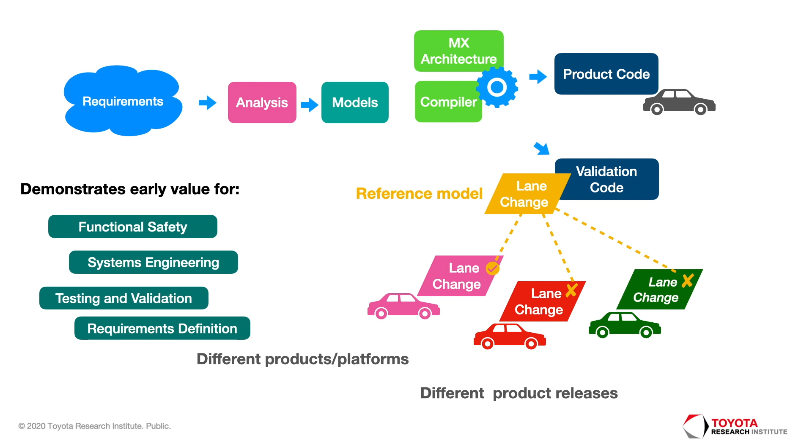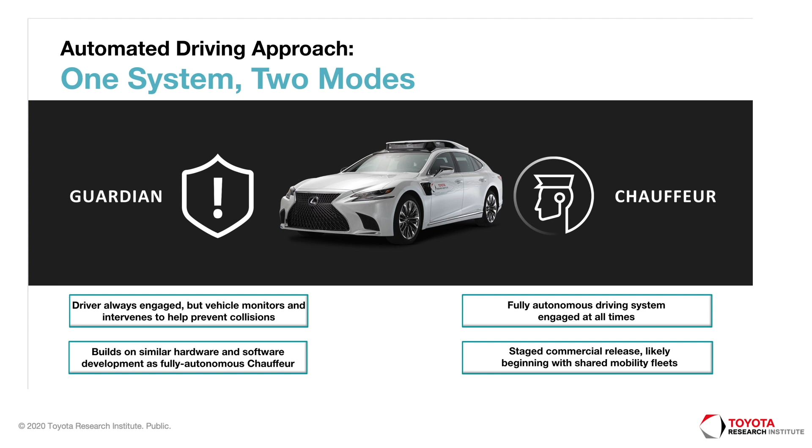So imagine, for example, you are driving along and a car suddenly pulls out behind a truck parked in front of you. Also imagine that you're aging. I was going to say grandparents, but let's face it, none of us are as fast as we used to be. You're not quite quick enough as you grab the wheel, so Guardian will amplify the response and safely guide you around the obstacle, seamlessly returning primary control back to you. This really encapsulates the spirit of Toyota in both our driving and robotics divisions. Our goal is not to replace humans, but to augment human capabilities so that we can do what we love to do safely, even as we age.

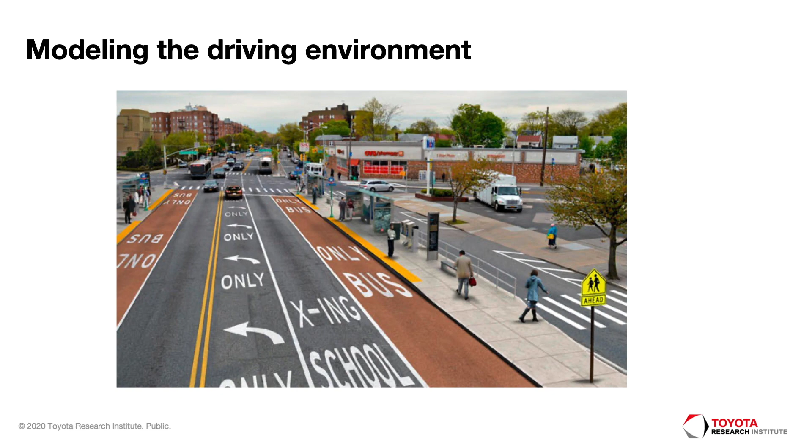Now look at it from a human perspective. Your inexperienced 17-year-old son or daughter can probably get through here with little difficulty. You can quickly reason where you can drive, where you can't, where and when you should stop, where you should yield, and so forth. Why is it so easy for us and so difficult from a computing perspective? I believe that part of the answer has to do with how our brains automatically filter information, and there are some parallels with our concept of subject matter domains.

On any executable UML project, we know that the first thing we need to identify is the application domain, which encapsulates the business purpose of our system. So what is the business purpose of our system? Well, if we are building an uncrashable car, it's not to crash. Plain and simple. Go the places you need to go, and don't hit or endanger anything along the way. We call this the vehicle guidance domain, not to be confused with low-level vehicle control. So the mission of this domain is: don't hit any pedestrians or vehicles, change lanes safely, respect traffic signals, basically follow the rules, and drive defensively.

Let's take a concrete example. Pun absolutely intended. Imagine directing the vehicle to get in the left lane, hang a left at the upcoming intersection, and end up in the leftmost lane on the other side. The elements that influence this progression of steps are at a minimum: the road, lanes, lane crossing policy, allowed turn movement, intersection, crosswalks, and oncoming traffic.

But let's hold on for a moment. We can easily find an endless set of features and low-level behaviors necessary to get all this to work, and succumb to so much complexity that we'd be tempted to abandon modeling altogether, and just hope that machine learning could solve all our problems somehow.

This is where I take a deep breath and tell you what 40 years of modeling have taught me as the most fundamental tool for wrangling seemingly infinite complexity. Are you ready? On the next slide, I'm going to give you the modeler's answer to the ultimate question of life, the universe, and everything. Seriously. Are you ready for it? Here we go. The true power of a model comes from what it excludes. You're welcome. I imagine that's only slightly more satisfying than 42, but let me elaborate.

Now let's come back to that intersection I showed at the beginning and see how we can use a model to interpret the scene. The diagram thumbnail on the left is a class model for one of the many subsystems inside the vehicle guidance domain.

This subsystem focuses on basic road structure. I realize it is too small to read. That's intentional, so stop squinting. Now we're going to use this model to parse the road structure we see on the right. The goal is to account for all of the critical features in the scene.

We start out by identifying the two intersecting roads and then populating the road class. By definition, every road has a right and a left edge, and that is true anywhere in the world, by the way, so we populate all the edges. Now for ease of presentation, we'll limit our attention to the road segment in the foreground. We identify its forward and reverse conduits.

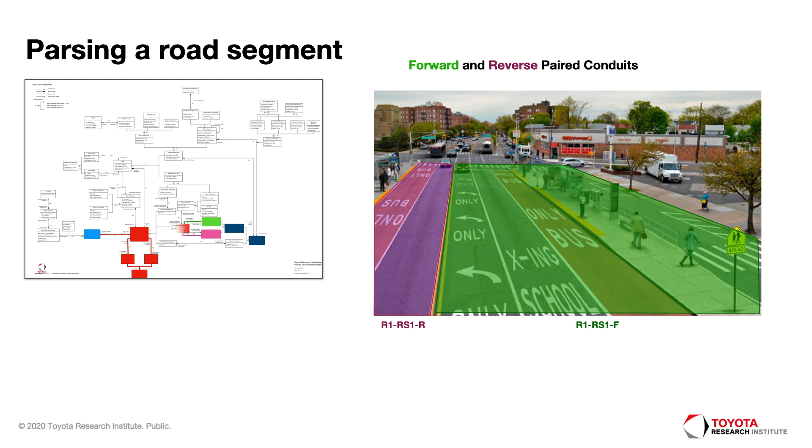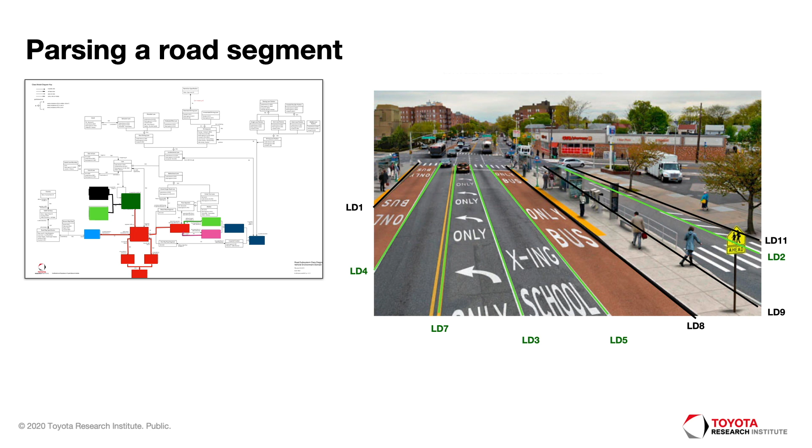A conduit is defined as a set of adjacent lanes all flowing traffic in the same direction. We mark off all of the lane divisions, noting those that are soft or hard. We may not care about paint, but we do care about physically non-traversable boundaries. We pick off the restricted and unrestricted driving lanes.

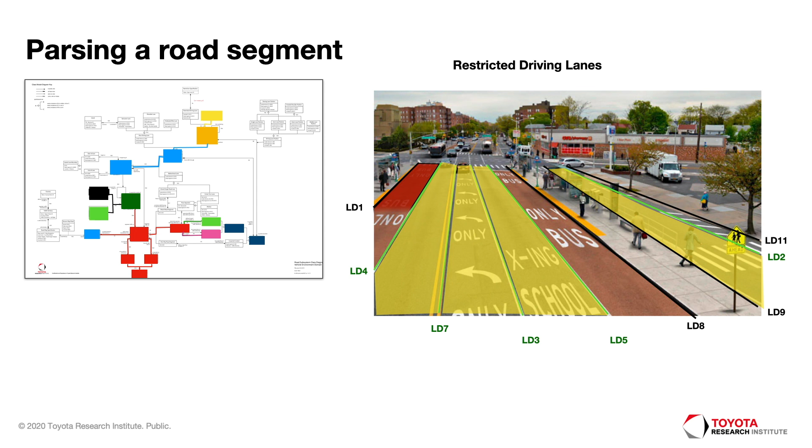Note that we use specification classes to parameterize restriction policies so that we need not subclass every flavor of restriction lane. Finally, we mark off a couple of exclusion lanes, which are lanes where you are not allowed to drive. One of these includes an island.

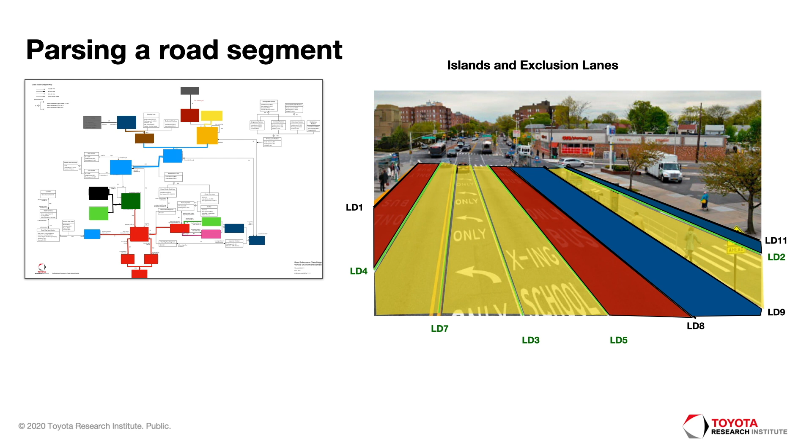And keep in mind that in actual use, this model would be continually populating itself, creating and deleting instances as the vehicle drives along. And of course, there are about 75 pages of documentation recording all of our modeling decisions and backing them up with street view examples and references to relevant transportation and road engineering standards.

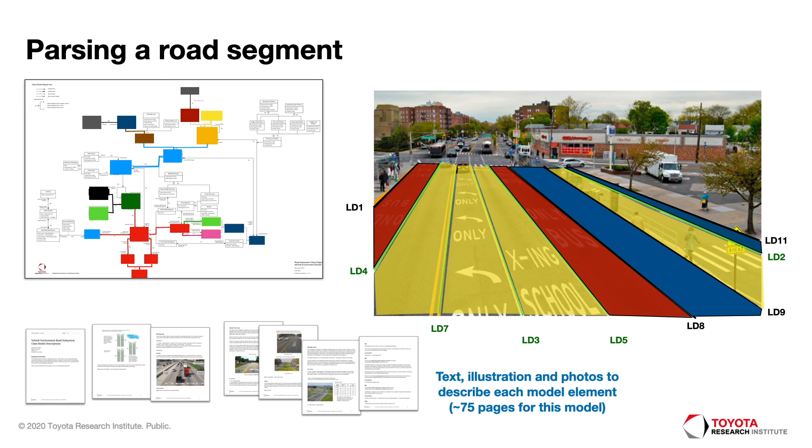The model of the road environment establishes real-world constraints on our vehicle's behavior. You can't make a right turn if there's no adjoining road segment or driveway. But how do we specify a specific safe maneuver, say a lane change? The trick is to formalize the relevant relationships between our vehicle and the elements of the environment that it needs to interact with.

Take a driving lane, for example, as opposed to a non-driving lane such as a shoulder or a bike lane. If an ego vehicle, that's what our industry calls the vehicle we are driving, is on a road, it is an on-road vehicle, as opposed to one that is in a parking garage. Now, if that vehicle is in a driving lane, it is an ego vehicle in a driving lane. Notice how we are specializing without resorting to generalization relationships.

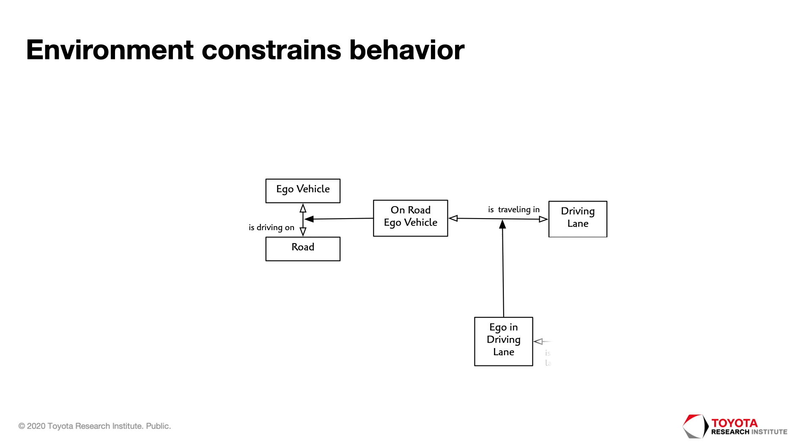Now, when this ego vehicle wants to change lanes, it must select an adjacent target lane, which of course has to be a driving lane. The attributes are omitted here, but I can assure you we constrain the model to ensure that only a driving lane in the same conduit may be selected. Our relationship to a target lane is, in fact, our lane change. It has a born and die life cycle that we'll look at on the next slide.

Before moving on, we do need a place to keep parameters that influence the lane change as well as other behaviors. So we model a driving profile that establishes a personality for our vehicle. Part of that is our lane change personality, where we can set values for how long we leave the turn signals on before beginning our maneuver, or how long we wait after completing a lane change before initiating another one. Okay, let's go take a look at that lane change state model.

A lane change begins its life cycle with the intention to move into an adjacent lane on the left or right. First, you have to wait for available space in the target lane. We'll rely on a service domain to do the necessary monitoring for our lane to open up. Once it is available, we put on our turn signal in the appropriate direction. After an adequate time period, remember that was in our personality, we begin crossing into the target lane.

Once in the lane, after some delay, we cancel the turn signal and then inhibit any future lane change for another time period. Finally, we declare success and the lane change instance is deleted. Of course, this is what happens when all goes well, and we know that this is often not the case.

What if the target lane is never open? What if some jerk gets into the target lane midway through your maneuver? What if you accidentally cross over the line before signaling for an adequate interval? More importantly, how do we know we have thought of every possibility?

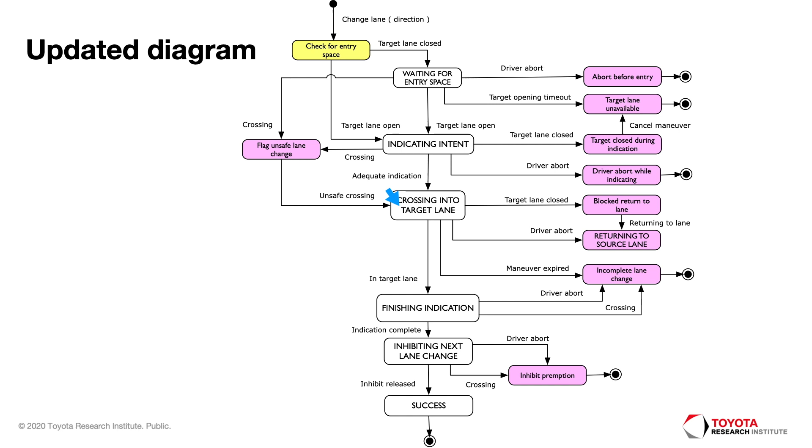Ultimately, though, this is just a visualization, and we rely on the state table for the purposes of code generation and for test coverage. Now that we have a complete model, let's see what it takes to produce the lane change evaluator. As we discuss in our book Models to Code, we eschew monolithic tools in favor of lean open source components that we can string together in various combinations.

For example, we express our models using a simple text editor to create a file that does not contain any graphical layout information. In fact, we completely separate the model, classes, states, relationships, etc. from the layout. Our layout style sheets use a lean but expressive language to yield beautiful and precisely laid out diagrams. So we don't need to waste our time pixel pushing when we create or edit diagrams. Plus, we can easily perform configuration management on the models and layouts.

We then use a language called Micca, a successor to the pycca language described in our book. The Micca processor outputs C source code, which includes a model-level test harness. It also outputs a beautiful PDF that organizes all of our model diagrams, documentation, and the surrounding Micca code so that we always have both the models and the design in one place.

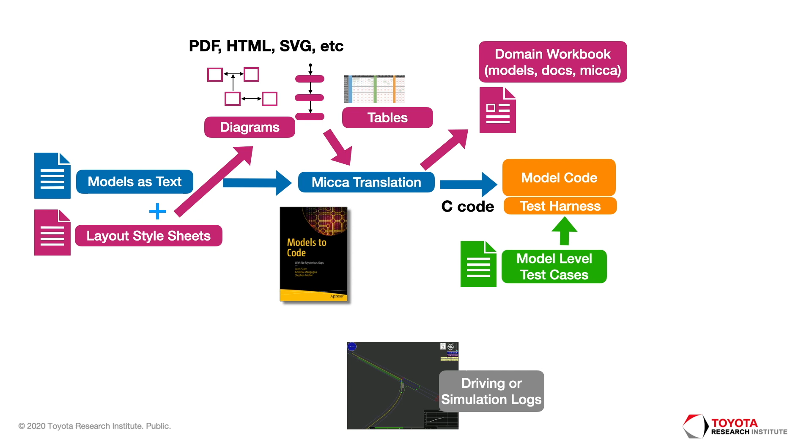Test cases are expressed using a domain-specific language, which produces code that mates with the test harness so that the test cases can interact with the model-generated code. We drive these test cases using simulated or actual driving data from our logs. Our team wrote some proprietary code to extract events and other information relevant to our tests. The tests output sequence diagrams and test coverage reports.

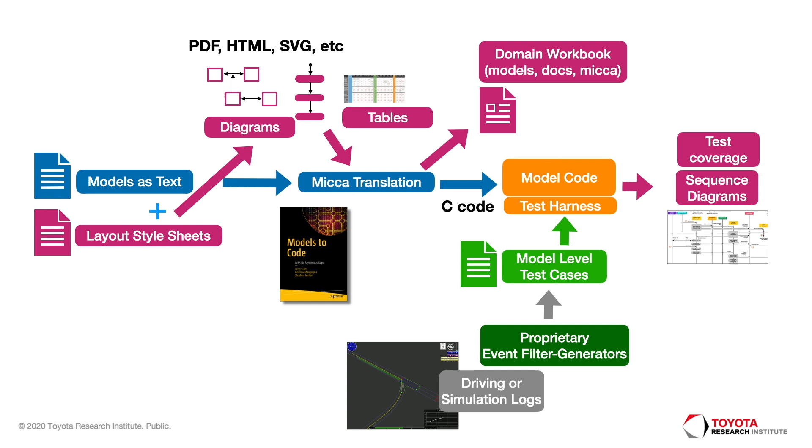I'm going to finish up by showing you our lane change evaluator in action. On the right, you see an excerpt from an actual drive in the form of a video with lots of time-stamped parameters. I'll play that in just a moment. On the left, we have a generated sequence diagram for that lane change state machine I showed you earlier.

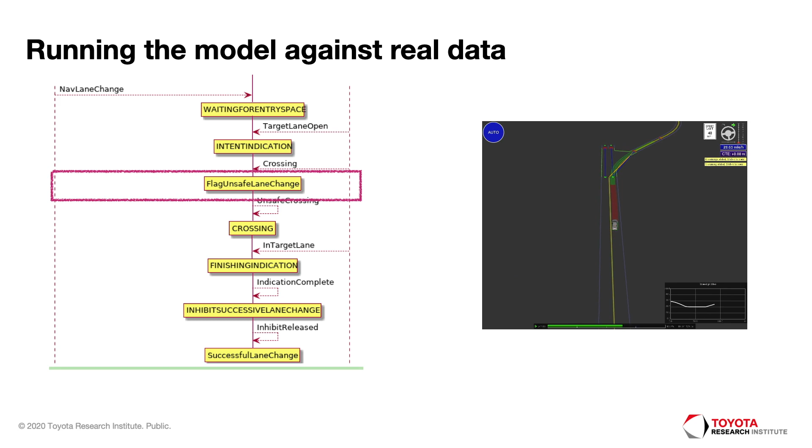As the vehicle on the right proceeds through a lane change, we scoop up the associated events and feed them into our state machine. If all goes well, we should drop through the progression of states for an ideal lane change. But if any of those pink states that we saw are entered, we can flag the problem. Now, when I run the test case, we see that the lane crossed event occurs while we are in the intent indication state. In other words, we observe the vehicle crossing into the target lane before signaling adequately.

Okay, it's summary time. Model-generated code can be used both to define a system and to evaluate an existing system. So if you're working on a safety-critical project with an existing platform, one approach you can take is to model the application domain. Then use those models to validate the system. A good set of models will uncover all kinds of nasty edge cases. Furthermore, they will expose just how sparse the existing test coverage is and just how incomplete the existing requirements are.

Evaluation models provide early benefits for functional safety, test coverage, and requirements definition. The results you get help you make the case for further modeling, both for evaluation and possibly for system development. A flexible and evolving pipeline of open source tools make it easier to demonstrate results and produce attention-getting deliverables. By leveraging existing open source tools and modifying them to suit your needs, you can do amazing things.

The tools should amplify your capabilities, not restrict them. Don't ever let your tools define what you can and cannot do. And when it comes to modeling, get good at excluding the right details. This will allow you to build powerful models quickly that make meaningful contributions to your project.